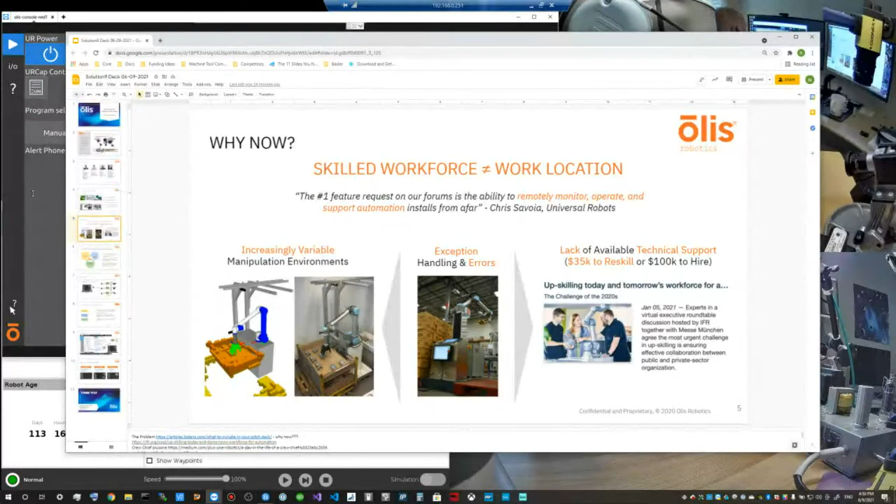I've got a more difficult problem. So this is sort of the kind of mindset that gave birth to this product idea, and what Olis is doing is taking these ideas of manipulation and autonomy, right, and also the whole IoT revolution, and saying, okay, is there a way that we can help out someone who's writing UR programs, and then other robots, which will be coming online behind that? Is there a way that we can do that and make it valuable?

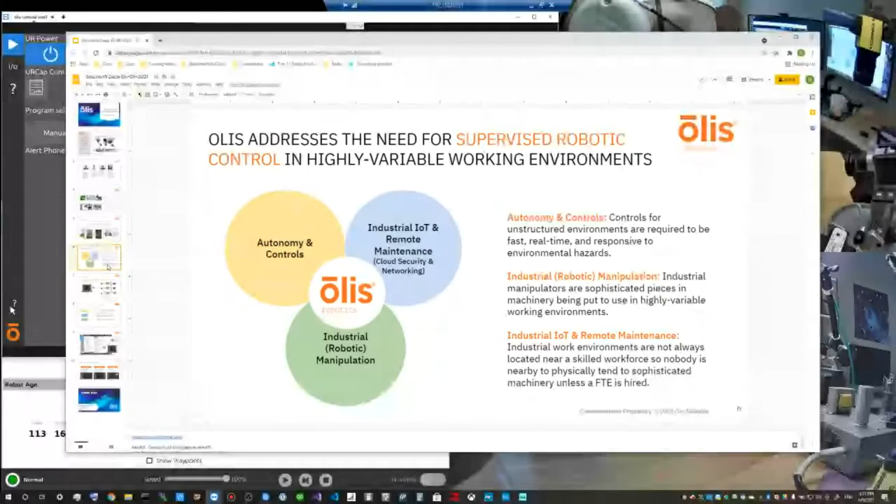Okay, almost done with slides, I promise.

This is sort of the high-level architectural picture of what I'm going to be demoing to you. So in order to do teleoperation, you need something with which to teleoperate. So it could be a joystick. Most of the people in the audience are significantly younger than I am, and so they actually know what to do with these particular kinds of devices, right? These are very inexpensive, ubiquitous, easy to find, and so this is the standard interface.

Those offshore drilling guys like very big, heavy things because they're kind of rocking and rolling around. And there actually is a whole other kind of mechanical interface to the product, which is also optionally used with this. In order to be able to teleoperate a robot, you need two things. You need to have control of the information stream. I need to be able to command it where to go and continuously see where it is. I need a simulator that draws up a picture for me of what the robot looks like, so I can kind of imagine where it is.

And then I need one or more, several live video streams, so that as I'm moving this robot around far, far away from me, I've got some idea of what the heck I'm doing. So the way that works is next to your robot goes a small IPC. You'll probably recognize the color. This is a very popular brand IPC. Happens to align with Olis's logo colors, so that's a happy coincidence. Probably save them about $4 in the long run when these go into mass production.

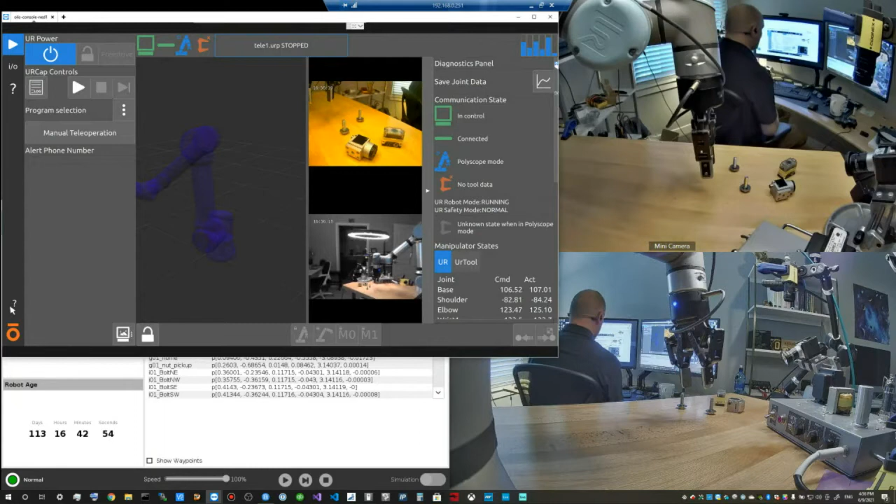The window that I have right here on the screen is a copy. I'm remoted in to the Olis Console laptop. So this is the laptop that you would have off in the middle of nowhere. You're the remote robot technician. You've got this laptop, and this is the software that's running on it, and this is what you would see.

This is also the laptop into which your game pad is plugged. This is your remote teleoperation station. Could be anywhere in the world, as long as it has an internet connection. What you'll see on this is I've got a picture of the state of the robot, and I've got a couple of video feeds coming in.

One is a Basler camera. The other one is actually the integrated camera that's built right into the laptop. The system's compatible with any camera that follows the GenICam standard. So you can have several cameras and you get an array of video feeds.

I've augmented these video feeds with a couple of humongous Axis security camera video feeds, which really just helps you see a little bit more what exactly is going on here. And then what I've also done is I've VNC'd into the Polyscope. This is the UR robot controller, so that we can do some things on that as well, and you can see what that's all about.

Okay, great. Let's go ahead and write a program. Here we go. All right, I'm going to put the robot in local control, and I'm going to assert that I would like to write a new program. Why not? What could possibly go wrong? So we're going to write a very simple program.

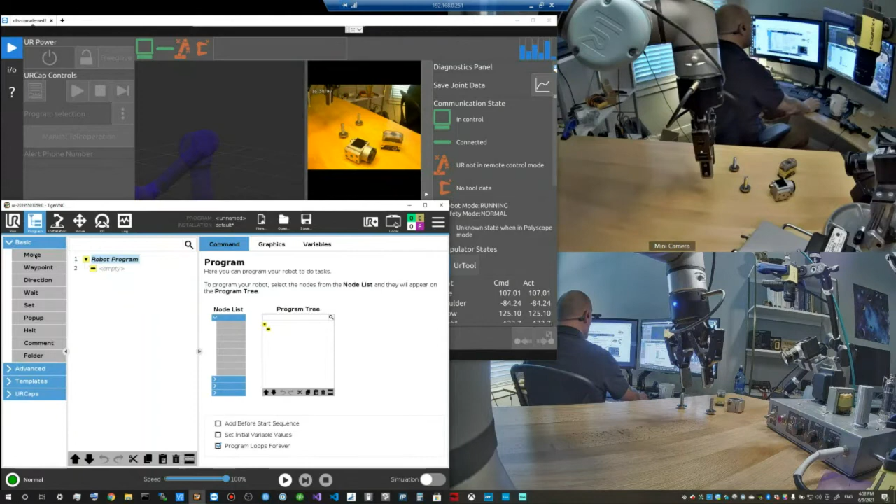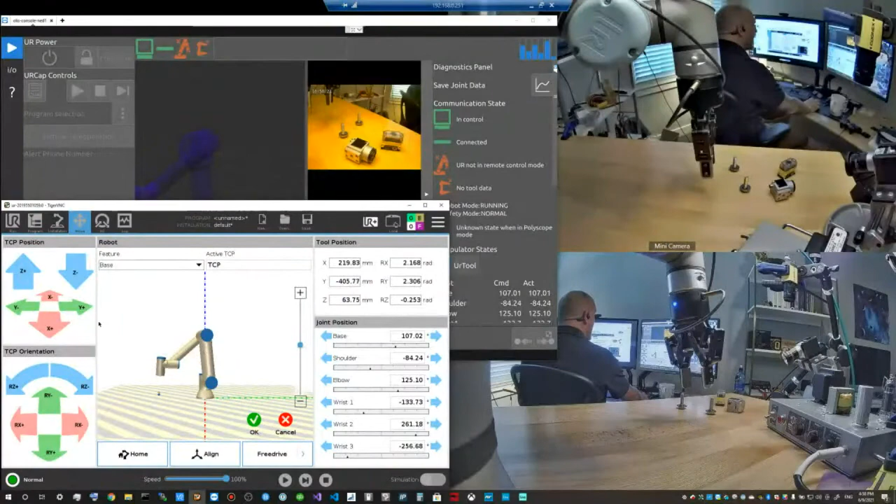I'm going to start with a move command. I'm very happy where I am right now, so we'll start by saying that we want to move to where I currently am. Then I'm going to add another move command. We'll make that a linear move. And I'll say that there I want to move somewhere else. I guess we can kind of jog over this way, or maybe we'll go this way.

I always like to be close to crashing into things. It makes robot programs so much more interesting and fun, right? Aren't we glad it's a UR and not a FANUC?

I probably wouldn't be as confident having this thing whack around behind my back. Well, not if it was a FANUC cobot. Okay, that's a different story.

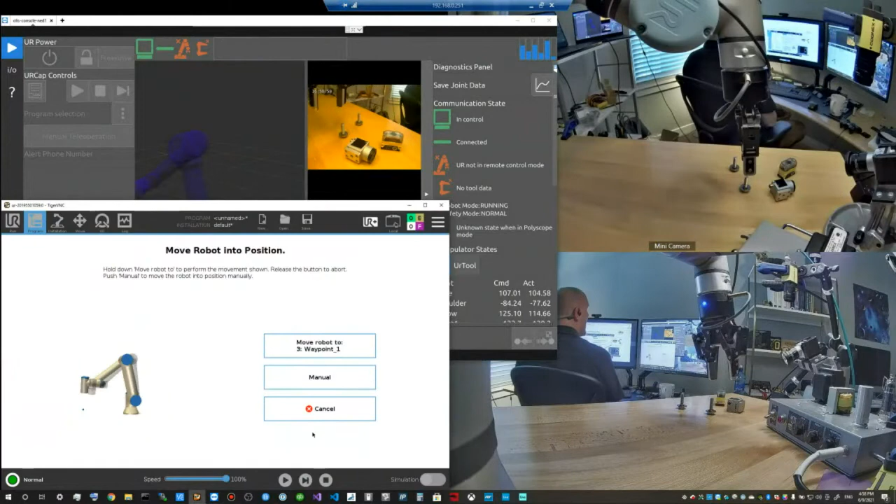Anyway, we move to waypoint 2, and then just because I like programs that loop, we're going to go ahead and at the end of the program go back to waypoint 1, and now I've got a super exciting program that basically we're going to have to move back to waypoint 1 for those of you who know how the URs like that.

And so now we've got this program running that moves from waypoint 1 to 2 to 1, and it's doing this over and over again because, as most of you know, by default, UR robot programs loop forever. So I'm going to just change that, and we'll run this program one time. So it starts here. Make sure I'm all the way back in position 1.

We run the program. It moves out and it moves back, right? We do this again. Same thing, okay? Last part of the demo. We're right on track here.

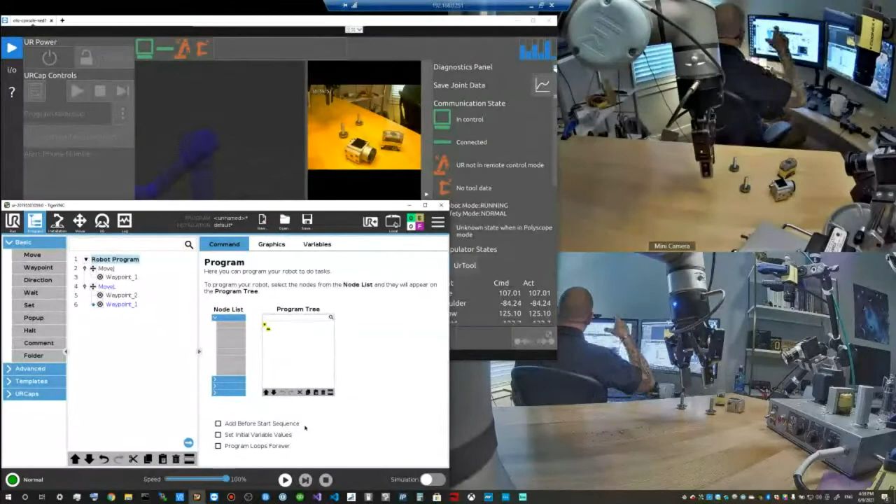So obviously I could be activating my gripper. I could be checking things. I could be checking digital IO. I could be finding something, touching off on it, opening my gripper, grabbing it, then checking 2 digital IOs to make sure that I really had it grasped the right way. And then I find that one of those digital IOs is off, and this is kind of the scenario that I want you to think about.

So what I do is, I'm not going to bother putting a conditional one in here. We'll make an unconditional one and you'll get the idea. Under URCaps now, because I have installed the Olis Teleop URCap, which you can see if you're familiar with URCaps and things. The Olis Teleop system is installed.

The only thing it needs to be configured for is the IP address of the Olis Connect computer that it's connected to. This is the local, that orange computer that's next to the robot. So that's the only IP address it needs to connect, and then everything is just kind of up and running. Okay.

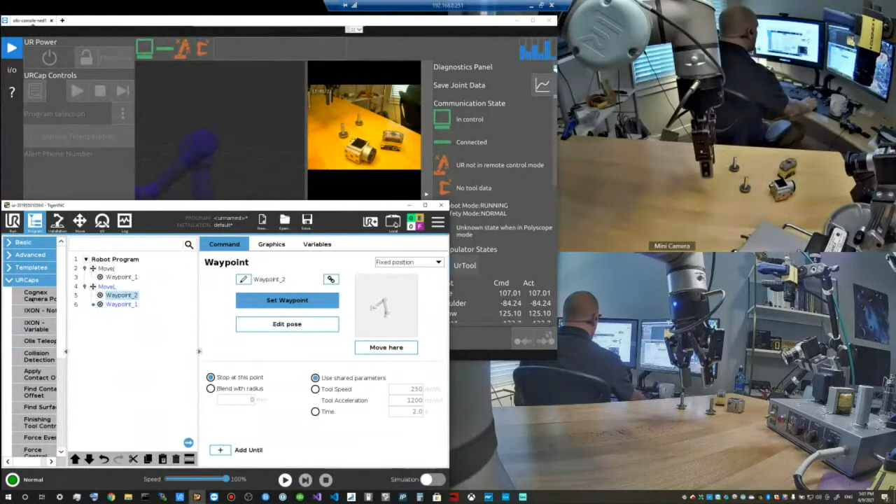Once I've installed that Olis URCap, which you'll see in my list of all of Ned's favorite URCaps, at least for this week, then back over in my program, exit, remember that button. Back over in my program, I've got an Olis Teleop function.

And if I put an Olis Teleop function in here, there are a whole bunch of ways that you can get this to terminate. We're going to leave this as the standard way, which basically says once teleoperation starts, it's going to stay in that mode forever until the person who is teleoperating says, I'm done. Okay. We could put timeouts in here. We could say you only get to teleoperate for 1 minute and then I'm going to take back over. There are all kinds of different interesting things to do.

And just for fun, we will modify this message that we're putting up here. We'll say teleop demo, something like that. Okay. So now I'm going to save this program because I'm that kind of guy. Give it a really, test one. I've never used that file name before.

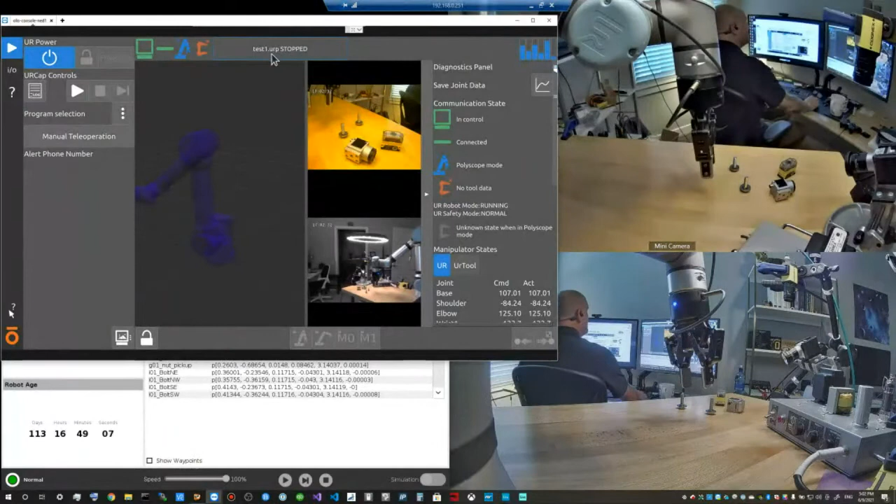And then we put ourselves in remote control mode so that I can now remote control this whole robot from this location. Okay, that's kind of the idea. You'll see that test1.urp is the program that I have loaded. I could change what program is loaded directly from the Olis Connect interface, which is super handy. Okay, since that program is loaded, I'm going to go ahead and run it.

So what should we expect to happen? So step one is the robot moved out to waypoint number 2. Now we're in Olis Teleop mode. It says, hey, you got control of the manipulator, okay? And now I've got control of the manipulator.

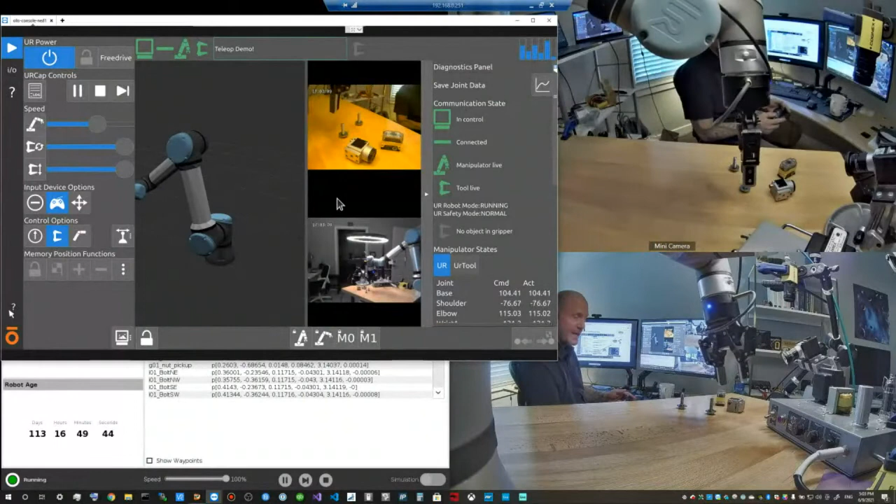I can come in here, I can move things around, I can swing, I can control my gripper, I can rotate, I can do all kinds of fun stuff, right? All of these things are now possible.

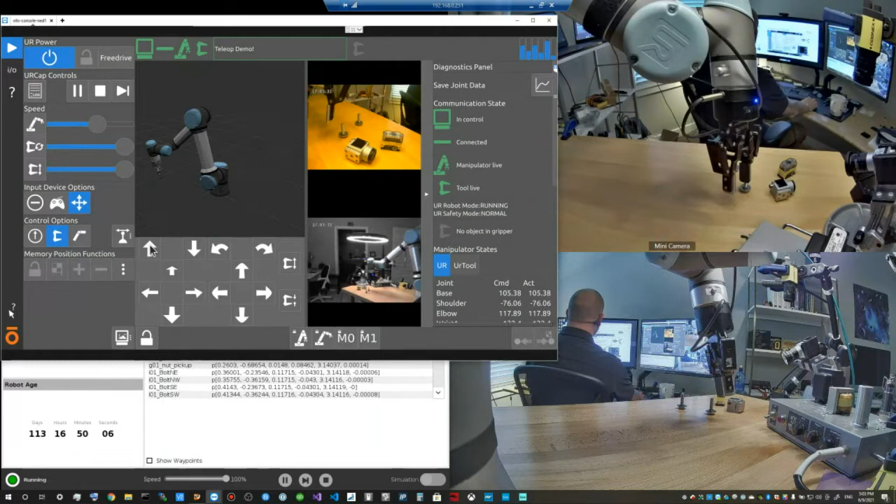I'm teleoperating. I can adjust the speed of my robot. I can adjust the speed that the gripper fingers are opening and closing. I can choose to operate using kind of a jog button interface. So what you'll see here is my simulation of the robot is moving along with my actual image of the robot, right? So I can click along here.

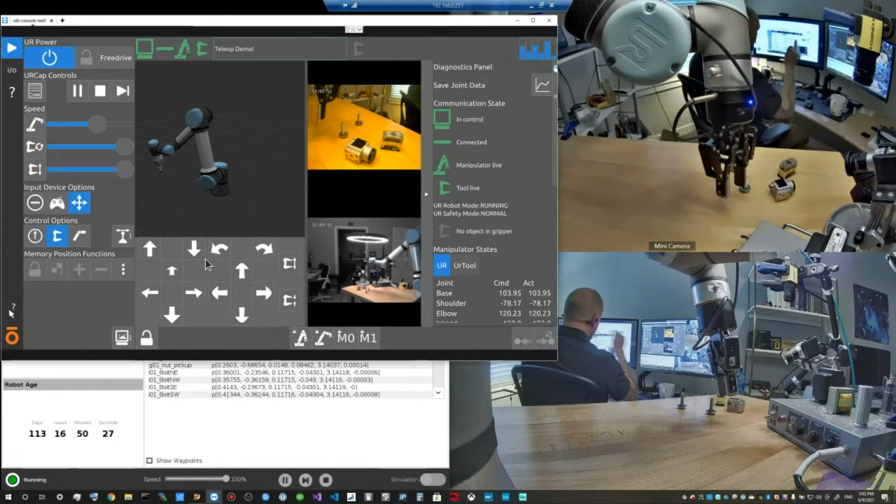I literally did teleoperation of the robot on my phone one evening. Didn't have this interface, but I certainly could teleoperate the robot using these nice little jog buttons. Okay, so we go ahead and do that. We can also operate either in world coordinates, really robot-based coordinates, or tool coordinates, TCP coordinates. Okay, so we can kind of play around with all that stuff.

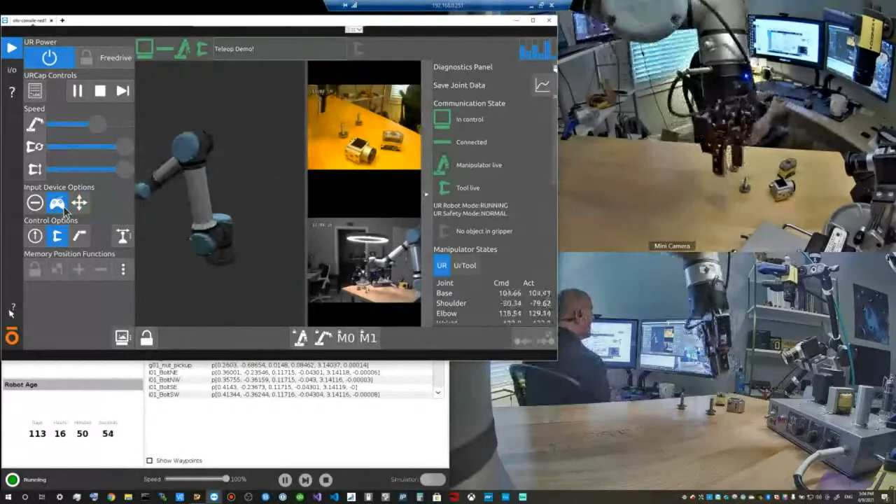And then when the teleoperation is done and I've fixed whatever problem it is that I'm supposed to fix, go back to gamepad here. Once I've done all of that, then I go ahead and I say, okay, I'm done with teleoperation. When I'm done with teleoperation, then the program finishes running and we're done.

Okay. So what I ask you to think about there, and this is one of the things that I love about this particular interface, the Polyscope ecosystem, this world. Once I show you this, I say, hey, you can drop this thing into your program anywhere you want, at any time. When you do that, if this interface is already open, that means I'm sitting here and I'm watching it. It will just immediately pop up on the screen.

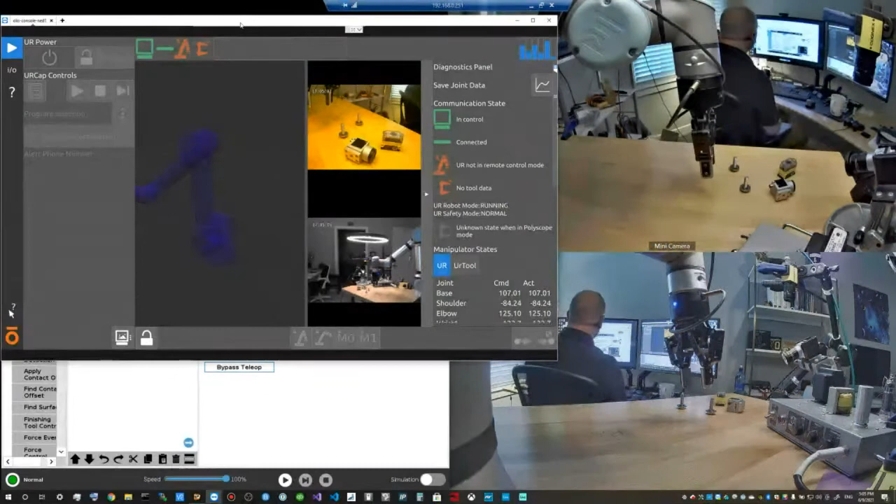If this interface is not open, you can go ahead and put an alert phone number in here. So if nobody is watching and the robot decides it's time for teleoperation, somebody gets a text message. That's kind of how that works.

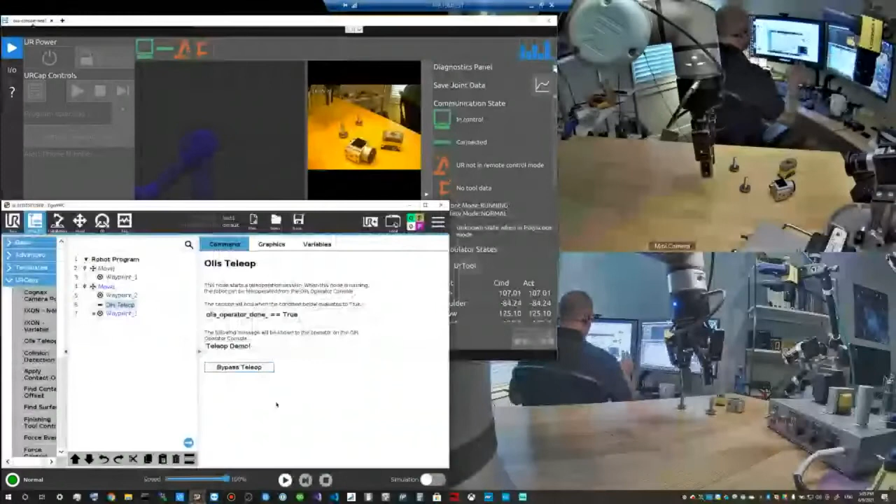Now, this is Rev 1 of this product. We have a huge and very interesting technology roadmap ahead to add on all kinds of additional features to it. But even at this version 1.0 kind of level, I certainly felt that it was the kind of thing that should be brought out into the world. Let people take a look at this. I think it can address, solve, an awful lot of problems.

It doesn't answer the problem of machine learning and real autonomy. It doesn't answer the problem of perception systems that are visually aware and can identify every object that they ever see. These are all really interesting problems that I've spent a lot of time working on in a more academic sort of context. But meanwhile, out here in the real world, we're trying to make robots do real stuff. And if we don't have the ability for the robot to figure out what's going on, isn't it cool that we can bring in a little bit of additional intelligence to try to save the day, or get us back up and running.

Obviously, in very large enterprises that maybe have a team of super robot programming wizards on site 24 hours a day, as I had at some of my former employers, this has a different focus. This might allow you to fix things faster, right? But for small and medium enterprises where you may not have that 24/7 dedicated force, or if you have 3 machines go down at the same time and you've only got 1 person, which of course never happens, right? If you have a situation like that, this I think is a really great tool that can really help get over some of these early obstacles.

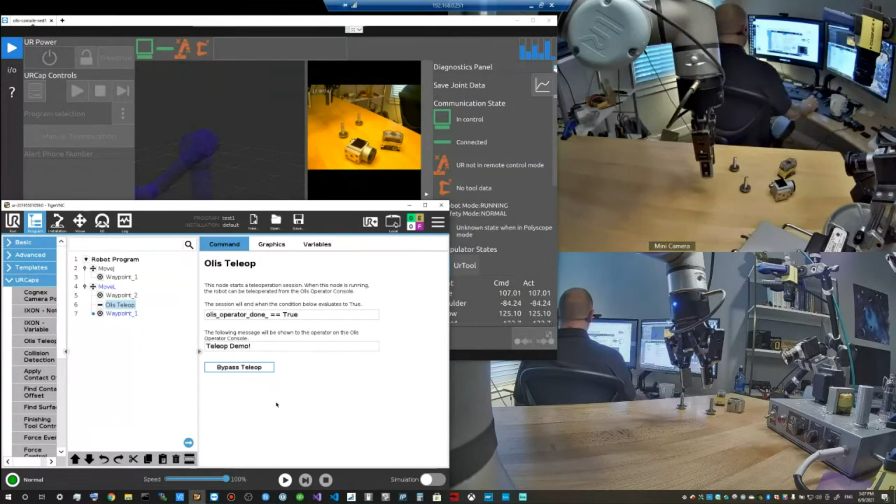Yeah. Thank you, Ned. We had a couple things that have come in from the room so far. One of them has to do with security. Obviously, if someone's going to remote in, they have to have access to the network to some level.

How do you handle keeping the network secure for that remote login? Yep, that's a terrific question. Obviously, in each different scenario, you may get a different answer. If it was me with 2 CNC machines in my garage, I might not even ask that question, right? It's like, hey, I want to go away with my wife for the weekend, and while I'm out of town, I want to be able to jog the robots around.

On the other hand, if I'm in the middle of a data center somewhere, and there are a bunch of other security concerns, this can be a much bigger problem. So there's several different solutions that we've used. There are off-the-shelf solutions for creating VPNs on AWS, on Google Cloud, on Microsoft Azure. There are also standalone products, people like ZeroTier.

I also mentioned IXON. This is a very interesting product. I've got it in my own lab. This is a router that can connect either hardwire or Wi-Fi or cell to the internet, and it also can connect all 3 given a certain priority. And it has the ability to connect securely through the public network, creating a virtual private network tunnel.